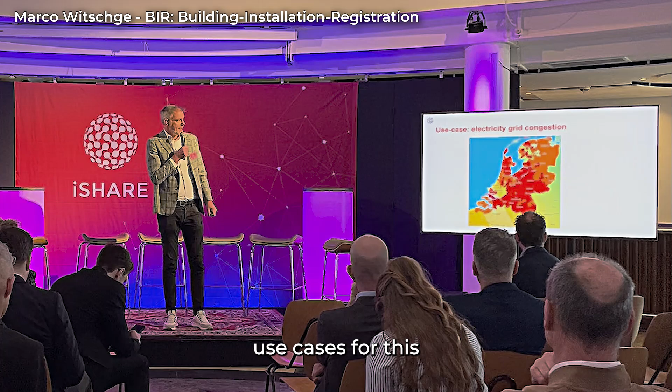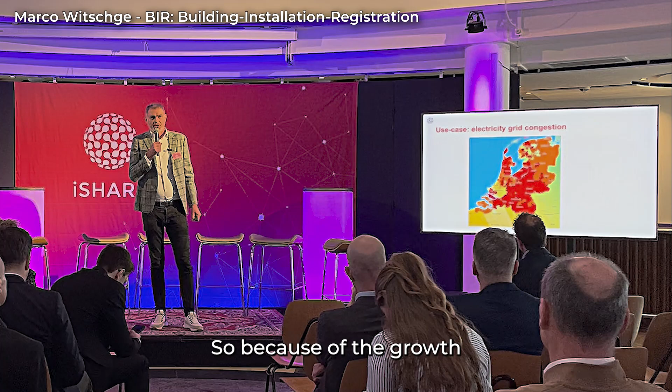So one of the first use cases for this installation registration process is electricity grid congestion. This is a big problem in the Netherlands. Because of the growth of solar panels and electrical cars, there is increasing stress on the electricity grid. You see there the red is not good.

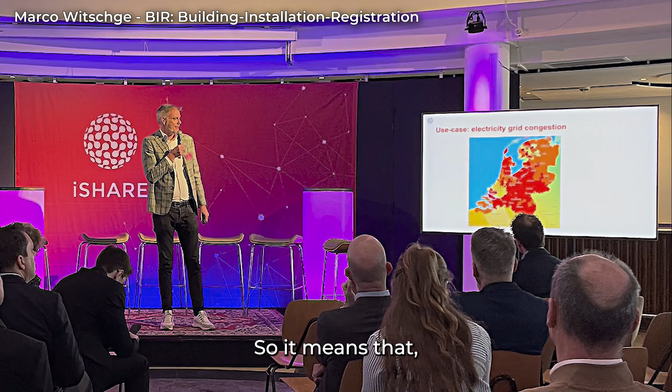So it means that we need smart use of the existing grid to know when you are using electricity and to optimize that.

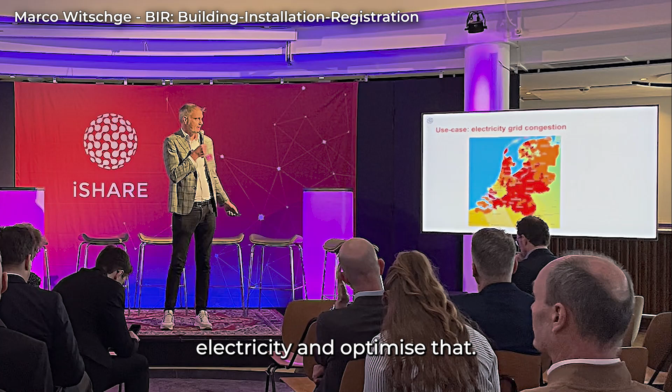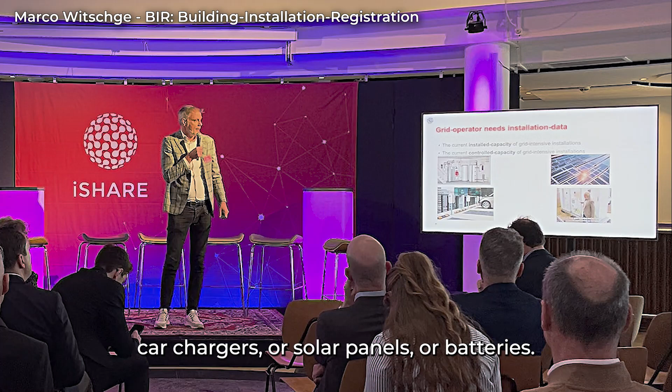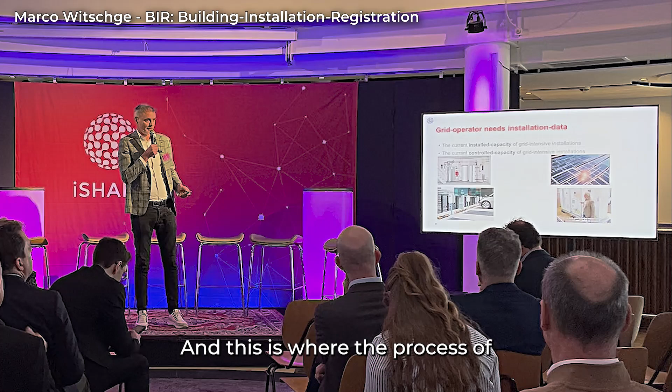So the grid operator needs installation data because it wants to know what is the current installed capacity of grid-intensive installations, such as heat pumps or car chargers or solar panels or batteries. But they also want to know if these installations are being controlled by a control system. And this is where the process of building installation registration comes in.

Then the next step is that the qualified installer registers the installation. So it goes into the building, or it looks into the ERP software to see what installations are in the building, and that's being registered.

And then the grid operator retrieves the basic BIR, the building installation register data, which is a kind of minimal data set - location, installation class, manufacturer ID, so very limited.

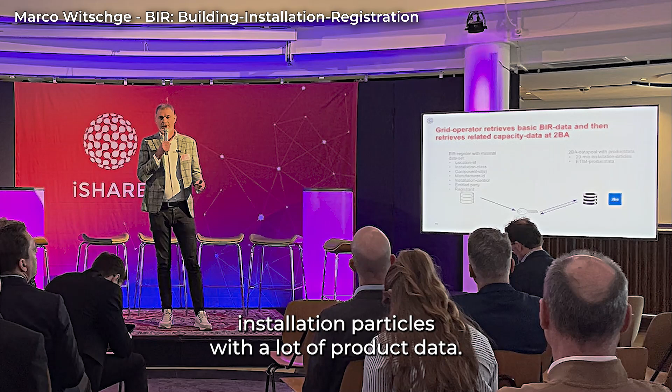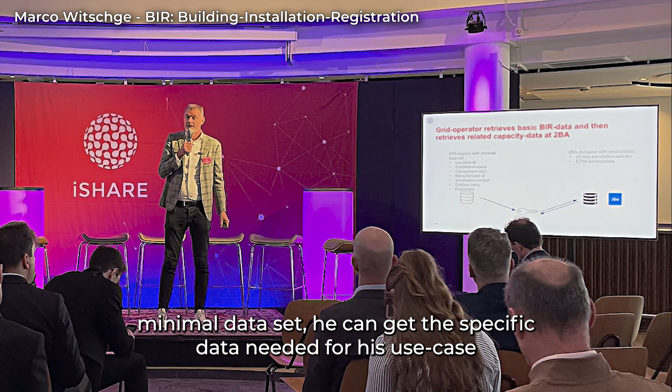And then we have a big database called 2BA, which contains 23 million installation articles with a lot of product data. And so there the grid operator can, with the key of this minimal data set, get the specific data needed for this use case, being the capacity.

And with that, the building owner and the grid operator together can optimize grid use and minimize grid cost, because the building owner will find out what is the capacity of the installed base and the controlled part of that, and they can share it with the grid operator, and together they can optimize the grid use and also reduce the grid cost. So this is a very practical application of a very urgent problem in the Netherlands today.